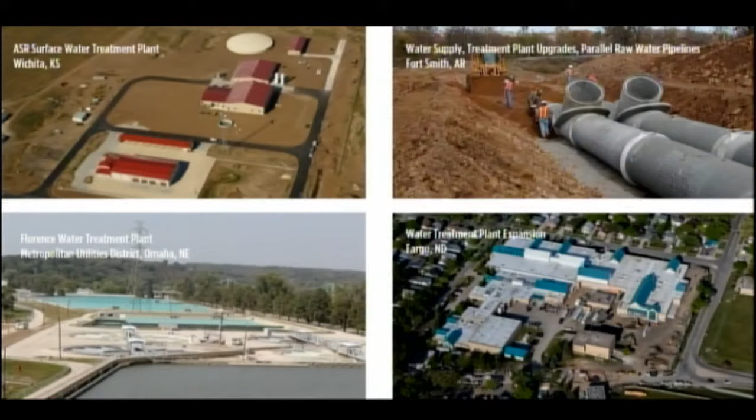A little bit about the experience of the team. Lots of big regional projects. This team, Burns McDonnell and Alberici, did your aquifer storage project. That was a global project of the year finalist, one of 4 projects globally recognized for the innovation the city put forth. Fort Smith, Arkansas's water supply, Burns McDonnell's done both the supply and the treatment plant and is now doing the conveyance lines. The Florence Water Treatment Plant in Omaha, Omaha's largest plant, that HDR has done numerous projects on, and then Alberici's work up at Fargo.

I'm showing you this not to say these projects are the scale of your project. Your project's actually very large in comparison. What I'm saying is we have experience in this part of the country, and in water treatment work. That's important because where you live dictates what kind of water quality constituents you have and what you're doing to treat that water more so than anything else. So these plants are very relevant to Wichita's water treatment processes and very similar to those.

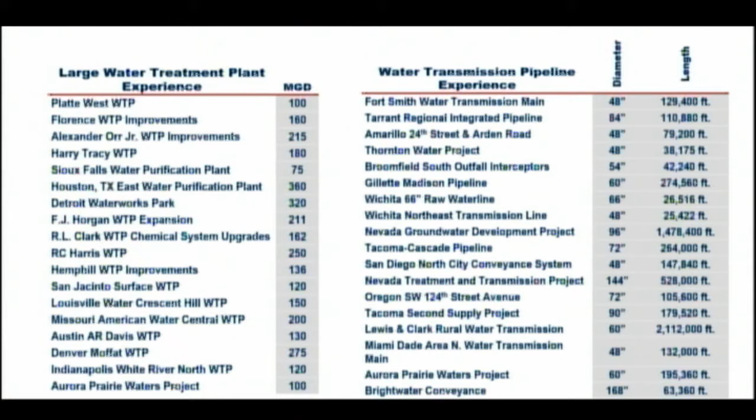That doesn't mean we don't have national experience. We also have national experience. This is HDR's work down at Tarrant Regional, the new water supply into the Dallas-Fort Worth Metroplex. HDR's work at Alexander Orr, the largest water treatment plant in the United States, in Miami right now. Burns and Mac work out in the Rocky Mountain region, advanced membrane water treatment plants that are really state-of-the-art. And then Alberici's work in Toronto, Canada as well. So we have local, regional, and national experience to draw from. In fact, looking at our large plant experience and our large water pipeline experience, we have almost 40 projects we can draw from to make sure we're delivering the right project for you.

Okay, Ron, quit talking about experience and start talking about the project, right?

The last bit of experience I'll show you is this one. I'd like Eric to come up and talk about this as well. This is Omaha's new Platte West plant, constructed just a few years ago. This project is a 100 MGD plant, very similar to what you'll have in Wichita. It's unique for us because Eric and HDR were the lead designers on this project. Alberici constructed this project, and Burns McDonnell permitted this project. So while it wasn't a design-build project, you have all three same partners here delivering your project that delivered this project. Eric, you want to talk just a little bit about this? Say a few things about Platte West and what makes it unique and what makes it match the facility you have here coming in Wichita, the Northwest Treatment Plant.

First thing, like Ron said, it's about a 100 MGD facility, so it's on the scale of the treatment facilities you have here. It's a lime softening facility with 6 solids contact basins of similar diameter to what we're working on here.

Granular media filtration, similar to here. High service pumping, chlorine disinfection with chloramine residual, all the same major elements we have for Northwest were completed here for the Platte West Water Treatment Facility. The one major difference is everything's under one roof. We went with kind of a submarine theme on this one and put everything under one roof.

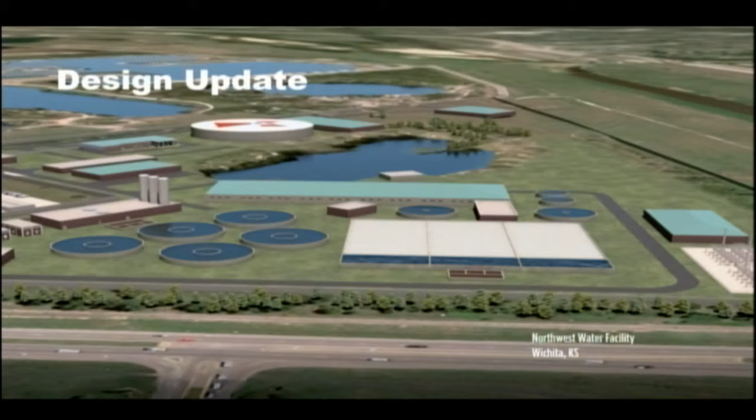Okay, I'm going to turn it over to Eric now. Sure, and we'll start with where we thought the project looked like when we started this back in February. Tyler's going to switch over here in just a minute, and we're going to switch over to the model as well.

This is what we had at the LOI stage. This was the concept when we first started, which you can see some large flocculation basins and other things. Let's go ahead and go to the next slide.

This is where it has evolved to. This is a rendering of the design as it stands today, which I'm going to be walking through in just a minute with respect to the model, so you can see some of the nuts and bolts and details of how this design went together.

The design, as you see it on this screen, for orientation: this is Zoo Boulevard, right along here, and 21st Street runs kind of along the top. That gives you the orientation. Generally north is to your left, and generally south is to your right.

This facility shows the point in design where we were before we started our optimization process. Some of the things you see here we've already decided to change through that process, like reducing the water towers for backwash - I'll talk more about that in a bit. There were 7 circular basins, and we've found a way to optimize and reconfigure that so we can go with 6. So some of the things on here have already been through an optimization process, but this gives us a picture of where we're at.

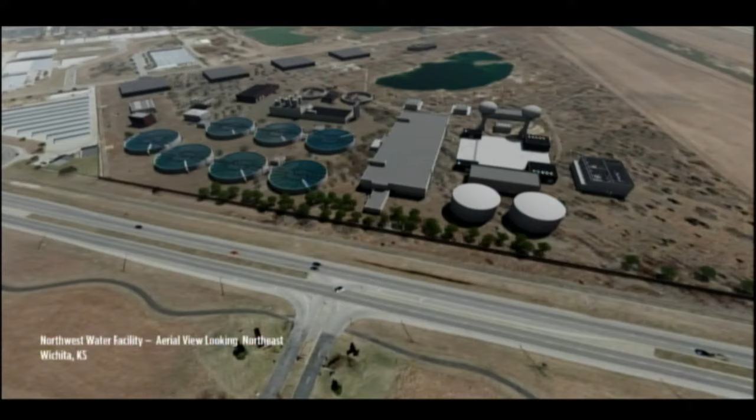Let's go ahead and jump to the model. We've used what we call BIM, or Building Information Modeling, software packages in order to actually do the design. It generates a 3D product from which we can generate the drawings, plans, and sections you might see for a normal design project.

It's important to note too, that's not grass - the blue pipes you're seeing are actually underground, actually buried. We've taken away the earth, if you will, here, so that you can see all the pieces that would be buried. The piping in between structures would be buried for freeze protection and to keep it out of the way so you can get around and service things.

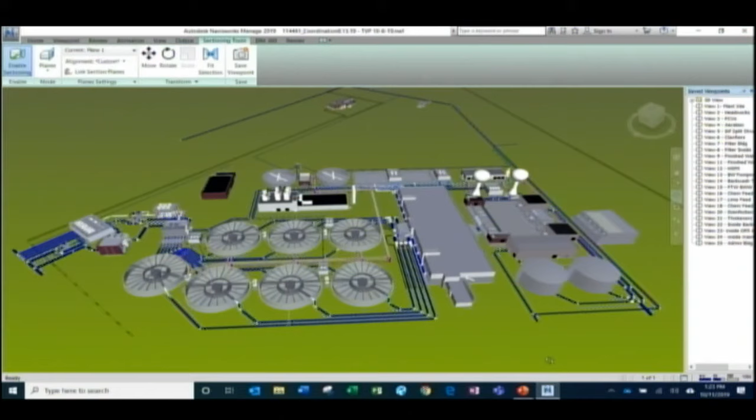But this should look similar to that overall, and it gives you an idea of where we're starting. We're going to move into a step where I take you, like a drop of water, through the treatment plant - what happens and how the design works as the water moves through. We'll also talk about subordinate systems, chemical feed systems, solids handling systems, and then personnel areas, administration, maintenance, etc. So let's go ahead, Tyler, and start at the headworks.

As Ron brought up a few minutes ago, the real benefit to the city of Wichita is you have two distinct primary water sources, the Cheney Reservoir source and a well field source. At the very beginning of the plant, we have the ability to control the flow from each of those sources so the city can optimize what water source they want to use, whether it's a 50-50 blend of Cheney and Wellfield, or 100% Cheney, or 100% Wellfield - and that's done in this very first building.

Before we dive into that building, I'm going to give you a sense of scale. Can I borrow that? I think there's a laser pointer on it - that might be easier for you to see.

See this little speck right there? That is a person door. So that gives you some sense of how big these facilities are. These pipes here are 64-inch pipes, so that's going to come up to your shoulder. These are large and massive structures in order to handle the volume of water that's needed for this community.

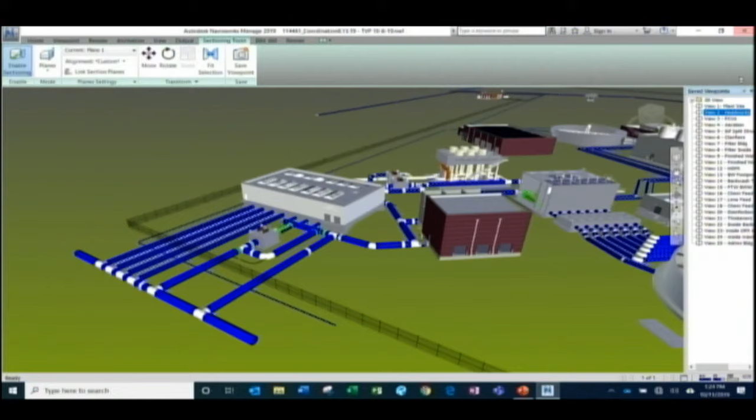So let's open up the lid. We're going to dive into this building.

As I said, you have two distinct water sources: your Cheney source and your groundwater source. We're going to use these valves here and these flow meters that you see in these vaults to really control the flow and allow the city staff to set the rates at which they want to treat the water. So this gives them that first step of operational flexibility.

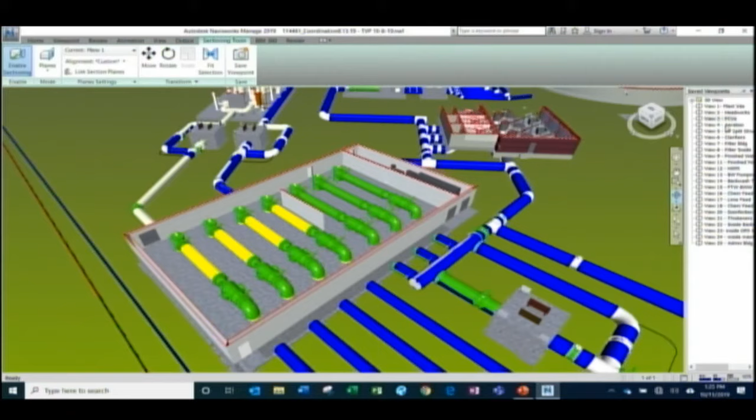Next, the groundwater itself, we're still reviewing this, but we're keeping it to discuss now, is aeration. Aeration is a process that can reduce the amount of lime we use and can also help remove iron and manganese, other things that show up in your groundwater or wellfield sources. So we have designed in here so that the groundwater would come through and go through an aeration process.

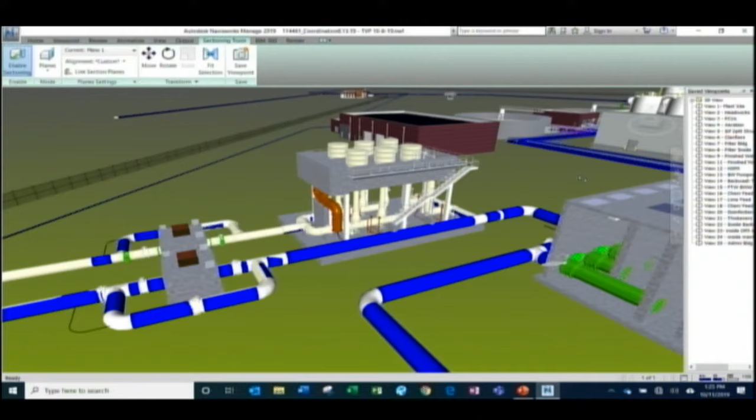Aeration is just like it sounds. The water flows up from the bottom here into these trays, think of like a waterfall. So as the water falls over the trays, it becomes in contact with air, and that does the work of the aeration process. You have an aeration process similar today, so this is an extension of a concept that you already have. But the groundwater would be capable of being aerated in this process.

Next, I want to talk about what happens now. We have both groundwater and your Cheney surface water, and we want to blend those together. We want to mix that up so that when it moves on to the next treatment step, it is a homogeneous or completely mixed solution, so that it makes it easier for the plant staff to operate it, so that all the water going to subsequent treatment steps is the same. It acts the same way, and we can treat it the same. And that happens in this structure here.

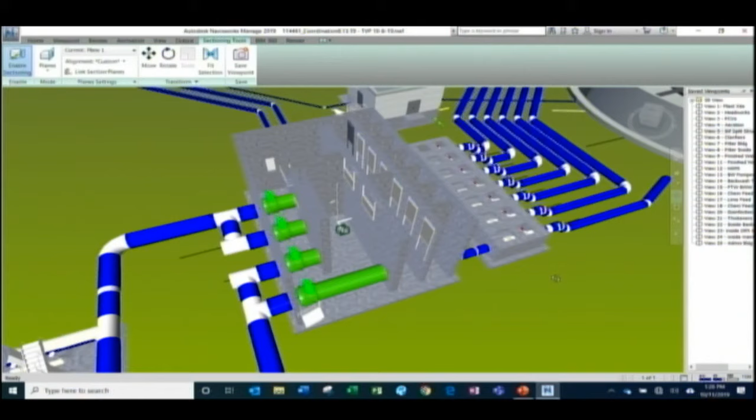Most of the time, the water will come into this middle. There's actually a wall here, but we cut it out so you can see this mixer in the center. What's happening here is both your Cheney water and your wellfield water mix in there, enhanced by the mixer, and then flow over into these and split amongst your next treatment units, which are our solids contact clarifiers. I'll get to that in a minute.

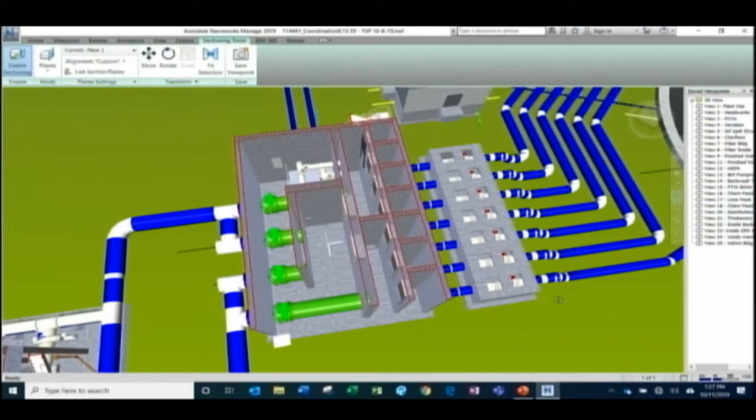This is a great place to talk about the redundancy and resiliency built into this facility. This is the normal chamber, but notice these bypasses on the top and the bottom. That allows us to move to these chambers if we needed to do maintenance on this chamber. So again, like Alan talked about at the very beginning, we don't have a point here where we can't do maintenance, we can still flow water through the plant and meet our 120 MGD requirement.

From this facility here, water flows off to the next 6 or 7. 6 is currently in the model. Solids contact clarifiers, and we'll do that next.

So these solids contact clarifiers are really the heart of your treatment process. This is where the raw water that's been mixed and aerated comes into the center. Think of these things as kind of a donut. The center is the donut hole, and the outside is the actual donut. So the water comes into the donut hole and mixes.

Is this cutting out? I think the battery's dying. Yeah, I'm just going to turn it off, it's almost more distracting. She's trying to find you another one. Is she? Okay, well, we'll go without.

Raw water and the chemicals come into the center zone of the solids contact clarifier, and that's where they mix. That's where we're adding our lime, ferric, and other chemicals that you use today in order to do the heart of our treatment. That's where we're removing the hardness, removing organics, removing other contaminants that are in the water, in that center zone. And that center zone is vigorously mixed, think turbulent. It's got a gigantic propeller mixer or turbine mixer in there, so that zone is mixed up, and if you look at it, it'll be kind of a white, chalky color from the lime that we're adding.

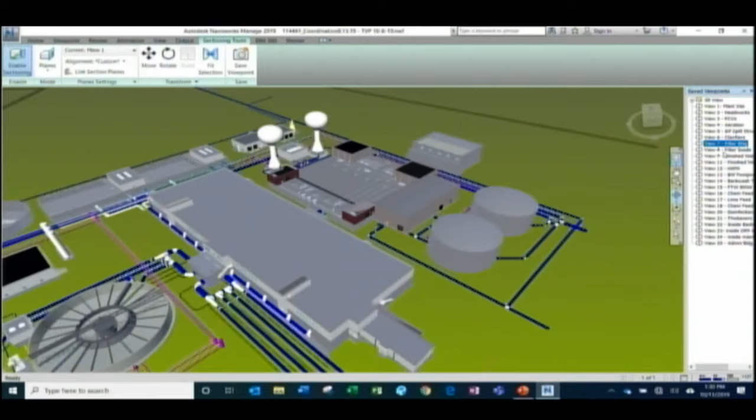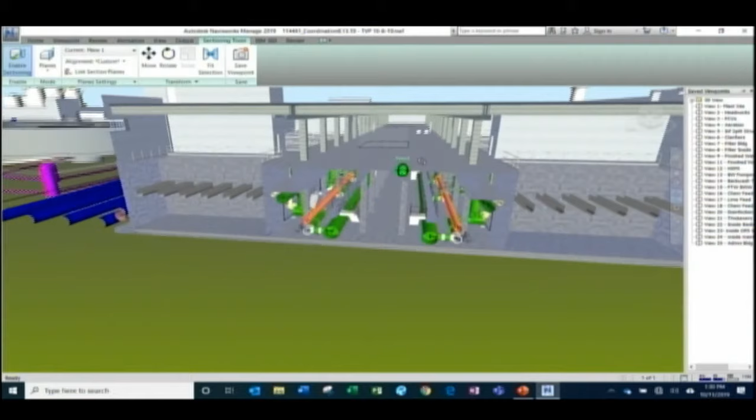The filter technology that we're using here, similar to what you have today and what we did at Platte West and other places, is granular media filtration. So we have layers of anthracite and sand that the water flows down through. As the water flows down through this media, the small particles get lodged in between the granular media cells and they're removed from the water.

So that filter is trapping those small particles in the filter. Clean water goes out the bottom, out through these pipes here, and the filter itself holds the last bit of the contaminants that we have in there.

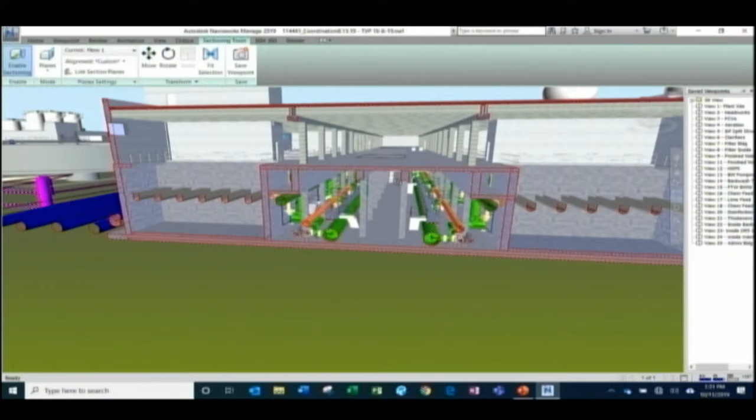A few items that I want to note on this filter building design. If you notice, all this piping is inside, so the large serviceable items for the city of Wichita in the future, valves, instrumentation, is all inside and accessible. You can see some stairs and access platforms that allows them to maintain this plant efficiently going into the future.

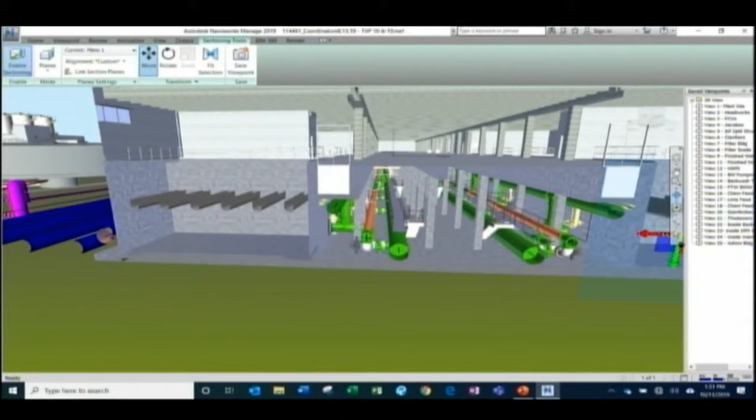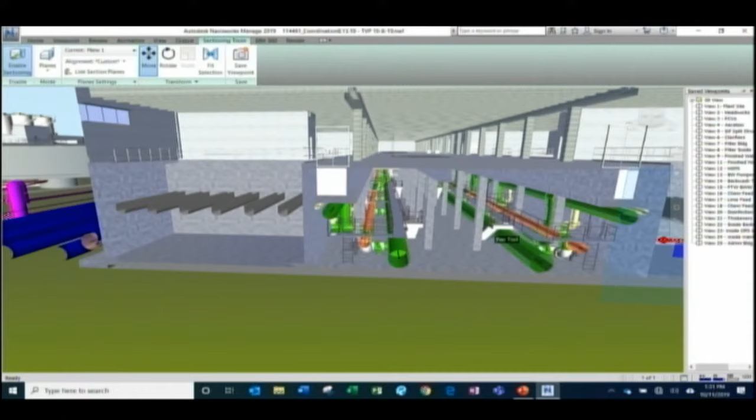The other thing I want to talk about is these channels - you can see one of those gates. The boxes you see there are where the influent water comes in. You can see this white gate here. So back to the resiliency and redundancy part of this, we can isolate small sections of the filter gallery and keep the rest of it going so that you could take a few filters offline if you needed for maintenance and still maintain the flow through the rest of the filter plant, okay?

The last thing I want to talk about is that this whole building is all enclosed in a building at this point. So we have filtered the water - it is clean and ready to go to the distribution system plus one step. And that's all enclosed in the building to keep it out of the elements.

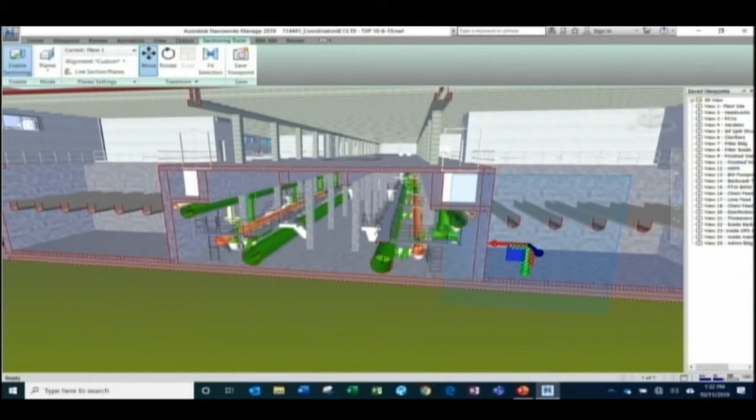After the water is filtered, the clean water that goes out of the filter plant moves on to disinfection. There's a lot going on in this figure here, so I'll try to point these out to you. This is our disinfection or CT basin, this rectangular basin in the middle. We have some backwash pumping stations here.

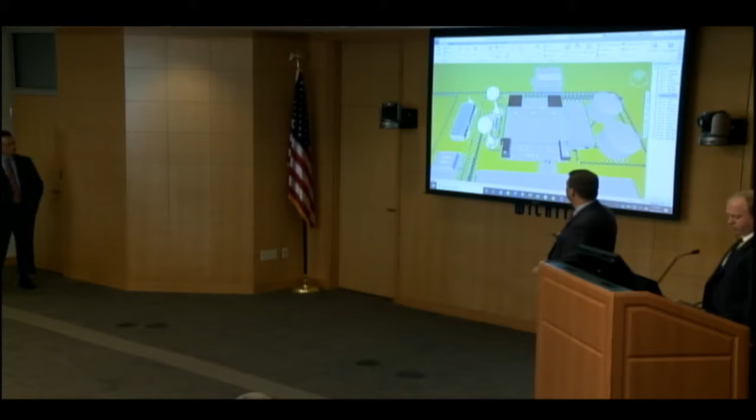We'll talk more about backwash in a little bit. We have transfer pumping or finished water pumping here. We have high service pumps here and storage of clean water. There's a generator, I'll talk about that a little bit. These are the backwash towers, which we have optimized to not need now, so we can use a backwash pump. And there's chemical buildings here, we'll get to those in a little bit.

But I want to focus right now on the center part of this - this is our disinfection step. So after the water is clean, we will disinfect it with chlorine. The disinfection is a function of many things, but one of the critical ones is the time at which the disinfectant is in contact with the water.

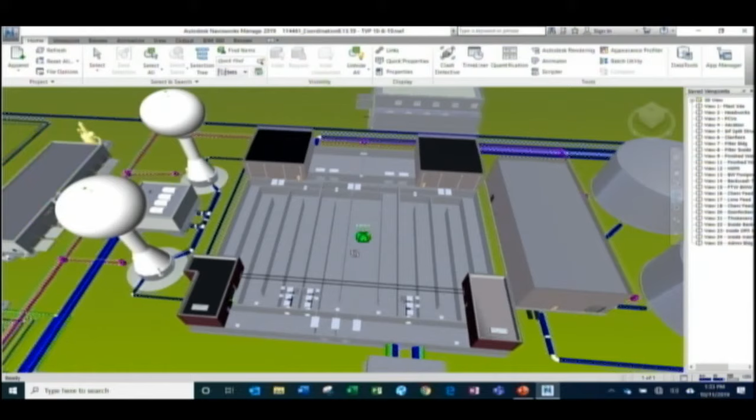And so you can see this circuitous kind of route that we have, these baffling walls in there. That's to make sure that the water works through the CT basin in the amount of time we want, avoid short-circuiting and get the full disinfection that we're looking for. So we're applying chlorine. Just scale as well - this building's also over a football field in size, right?

This is well over a football field as well, like two side by side probably. So you've got the main field and the practice field, that kind of thing.

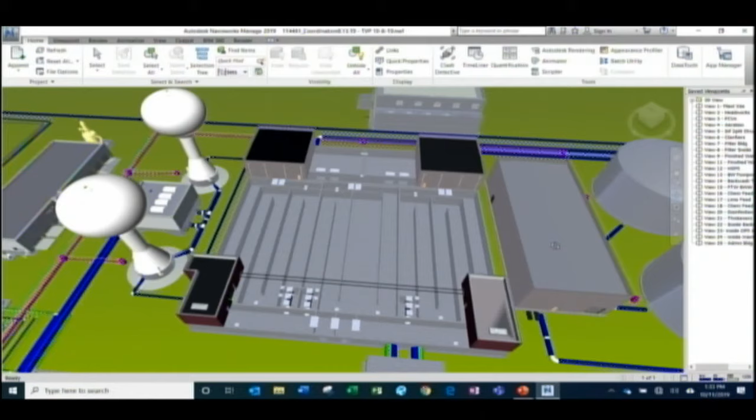For scale purposes, we add chlorine at the front, and then at the end, for our residual disinfectant, we're adding ammonia to form a chloramine. That's similar to how the city does it today. That chloramine disinfectant residual is what's distributed out to your customers, to the cities and homes of the citizens of Wichita, and that protects the water as it moves its way out into the distribution system.

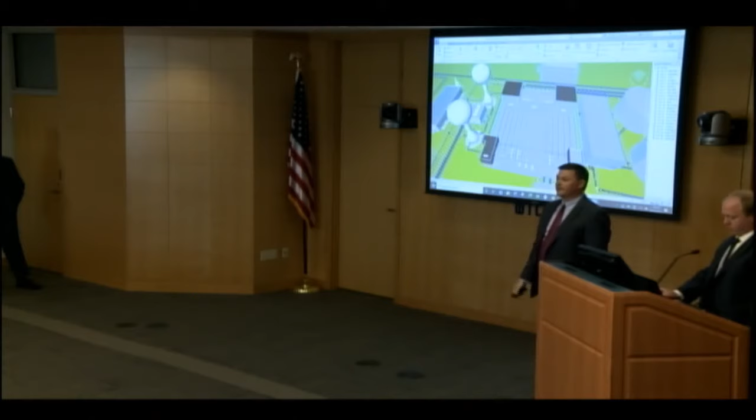As I talked earlier, there are all kinds of different pumping applications, and we'll talk first about finished water pumping. So we have water that, after it's been disinfected, we transfer to the HES, your existing HES reservoirs pumping stations. These pumps are designed to pump water that's disinfected out of the reservoir and transfer it to HES so it can be distributed back out into the city.

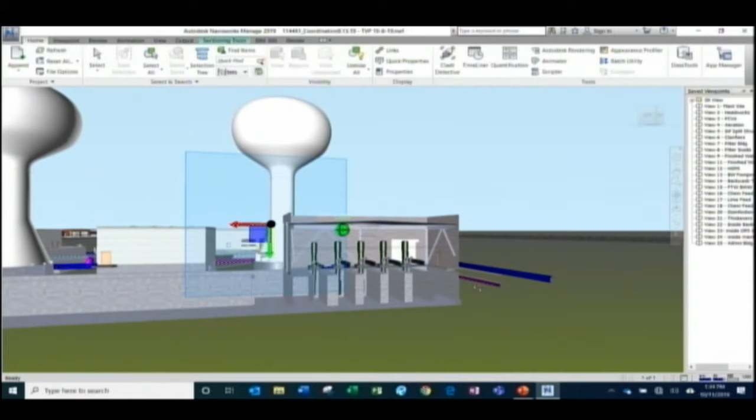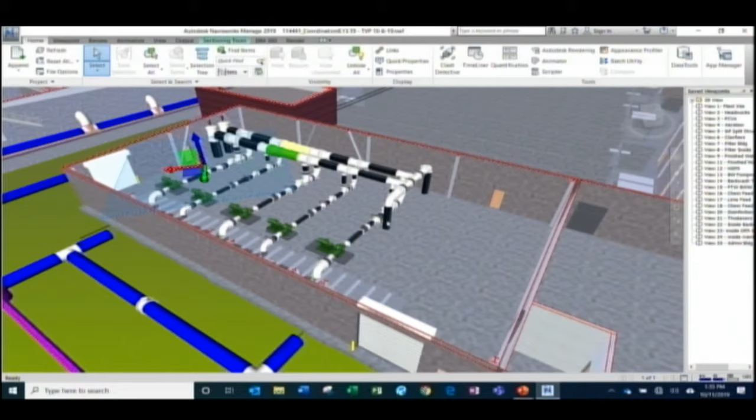We also have, let's go to the high service pumping station. In another mode for resiliency and redundancy, we have high service pumping right here at the treatment plant. High service means it goes directly from here to your customers, to the distribution system, to the residences and businesses, right from this plant. So the actual pumping that distributes it out to the community is somewhat here and somewhat at what you have existing at your HES facility.

So if you have a problem at one HES, you can still push water to the community from here.

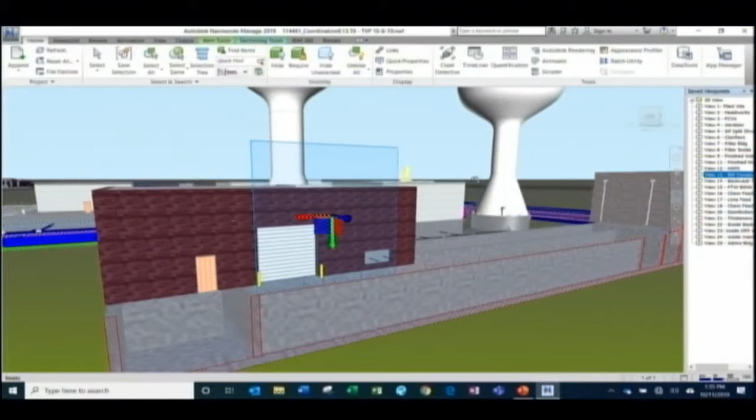The last pumping function that occurs in this station is backwash pumping. And like I said before, the towers—we've gone through an optimization process and we can do the level of backwash we want without the tower.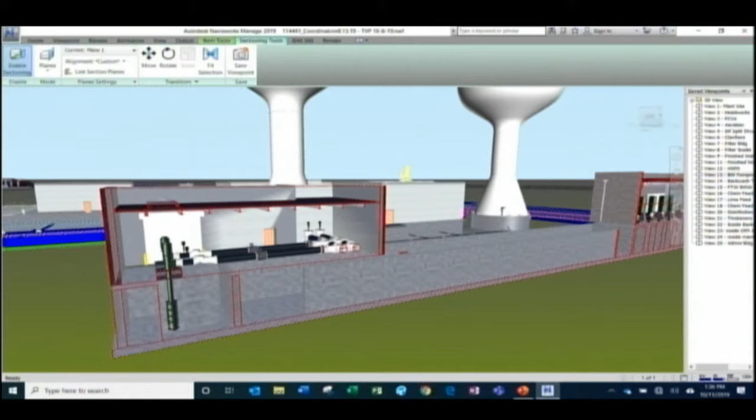So backwash, what's that mean? Remember we talked about the granular media and the filtration, and how all the little particles get stuck in the media? Well, that has to be cleaned out. Backwashing is just exactly like it sounds. We push water backwards through the filter at a vigorous and high rate, and that takes all of the media and separates it out and generates a lot of collisions, and all the little dirt particles work their way out of the media and go out from the filter so that your filter is clean and ready to go into filtration mode again.

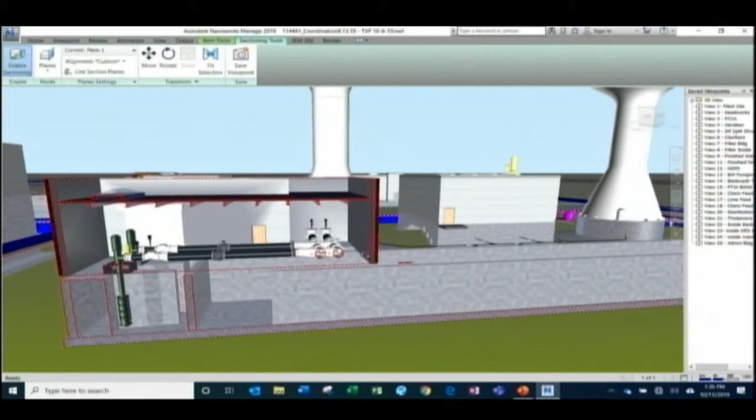So we use pumps to pump water backwards through the filters in order to clean that media. That water, which comes out of the filter after the backwash, will go to a backwash equalization basin. That water is good water, and we don't want to waste it, so we can take the backwashed water and return it to the very beginning of the plant and treat it again.

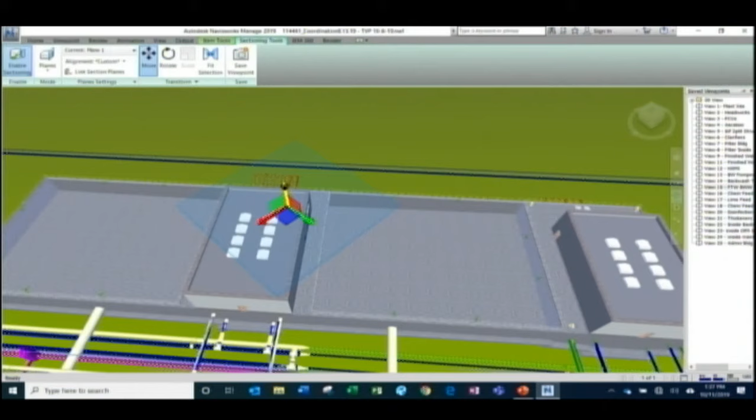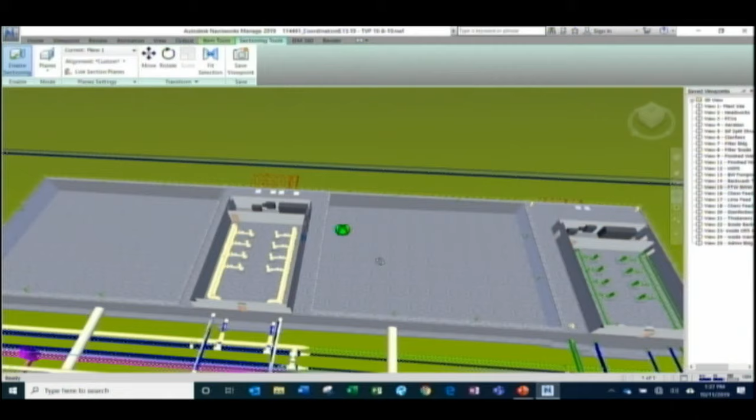This allows us to reduce the amount of water we need to take from Cheney or your well field in order to produce water going forward. So this is an efficiency step that allows you to recycle some of that water back through because it can be used and treated again. We have basins here that collect that backwash water and pumps that return it to the head of the facility, at a steady state all day long. The backwash may take 15 or 20 minutes and generate a large volume of water, but we want to return it steadily the entire way back through the plant. That's what these basins do.

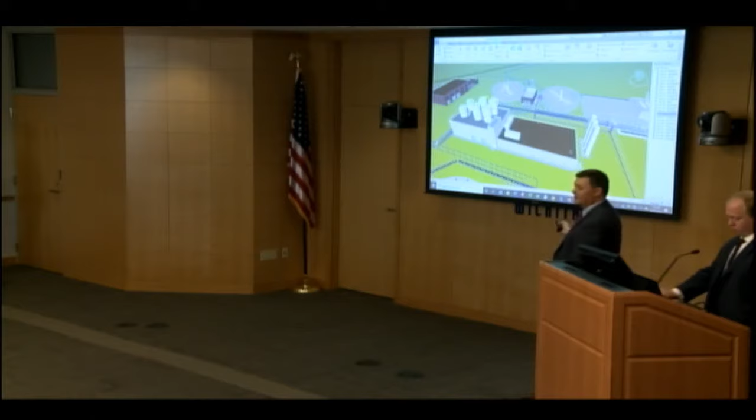Remember back to the solids contact clarifiers, we talked about adding chemicals. Chemicals in water treatment have specific design-related items that warrant keeping them in separate buildings. So we have all of our chemical systems for the treatment of the facility in their own buildings, so that we can manage ventilation and safety-related items and keep those chemicals separate. We have dry chemicals like lime here, and liquid chemicals like polymers and other things. So we're going to cut in and take a look at the dry chemicals.

This is the lime feed system. We have dry storage here, it comes through the building, and is slaked.

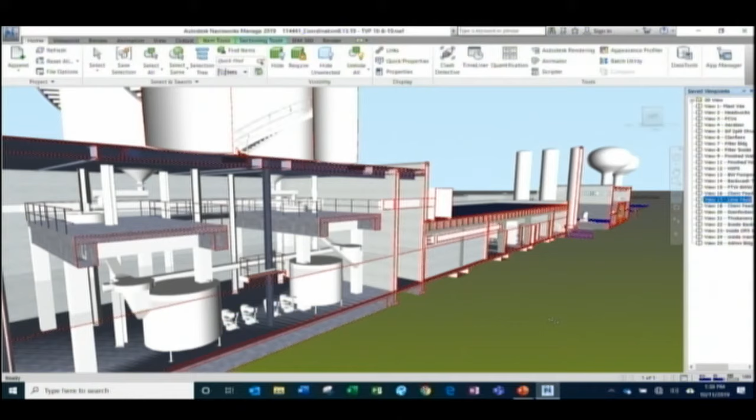Lime is one of those chemicals that as dry, you have to mix it with water to make it useful for you, so that's called a slaking process. So we're going to slake it, and then we can pump it out to the different solids contact clarifiers we've already talked about. Similarly, on the liquid side, we have a series of bulk storage tanks and chemical metering pumps, which pump a precise amount of liquid out to the different treatment units.

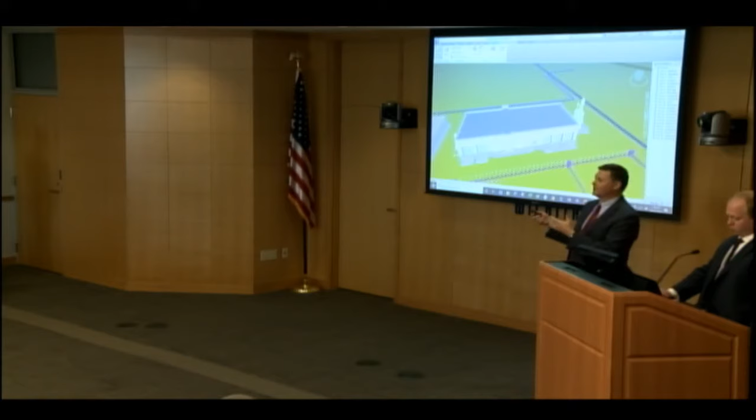We talked about disinfection. The disinfection chemicals, your chlorine and your ammonia, are also in their own building for the same reason as the others, to maintain ventilation rates and safety. So we're storing both chlorine and ammonia in their own separate building, and then they will be metered out to the rest of the facility as needed.

The last thing we want to talk about from a treatment perspective is solids. At the beginning we talked about the heavy solids going down to the bottom of the solids contact clarifiers. Those solids are periodically pumped out to be disposed of, and they go into these thickening basins, and then these pumps will pump them to the city's existing lagoon system where your solids go today. So that's the solids management portion. That takes us through the high level of the design.

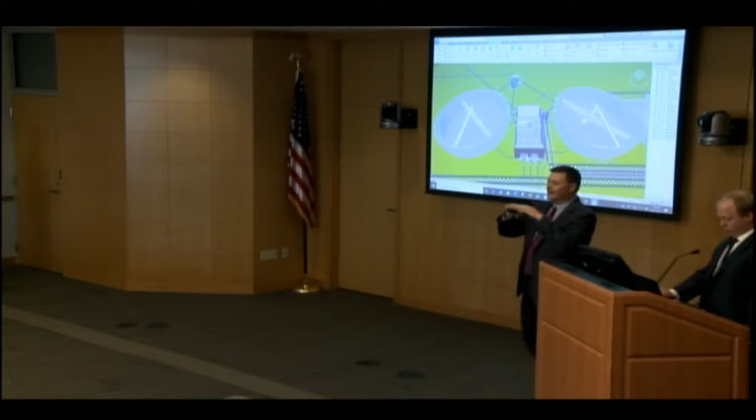As you can see, there's a lot of detail, a lot of piping, a lot of valves and parts, but I hope you understand now how we get water from the beginning to the end, and all the facilities that support that and the design level that's gone into this at this stage. One thing to move on to is that you've got people that run and operate these facilities, so there's personnel spaces as well for the treatment plant. Let's go to operations first.

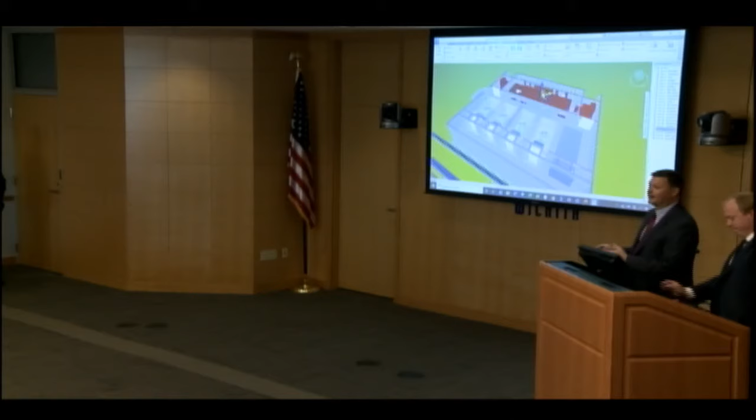Oh, backup power, thank you, I almost forgot. Part of the resiliency of this facility is providing backup power. In the event that you would lose utility power, we have a series of diesel generators that would provide power for the facility so that it can be maintained in the event of power loss.

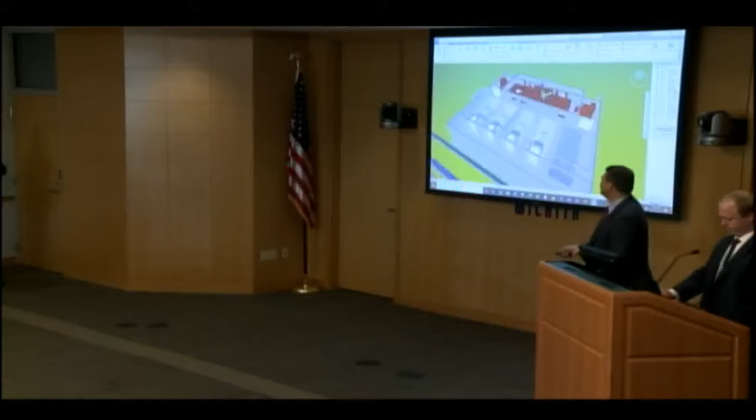Now we'll move on to personnel areas. The first one is operations. Operations are people on the day-to-day front lines of operating this facility, monitoring the large SCADA screens, watching chemical feed rates, flows, etc. The guy that sets the flow rates we talked about at the very beginning, this is where they would be housed. This building is a hardened building designed to withstand severe weather, so in the event of a potential tornado, they would not have to leave their post. They can stay there and continue to work, and that provides for the resiliency of this facility. This sits just adjacent to the filter gallery, in the heart or center of the plant.

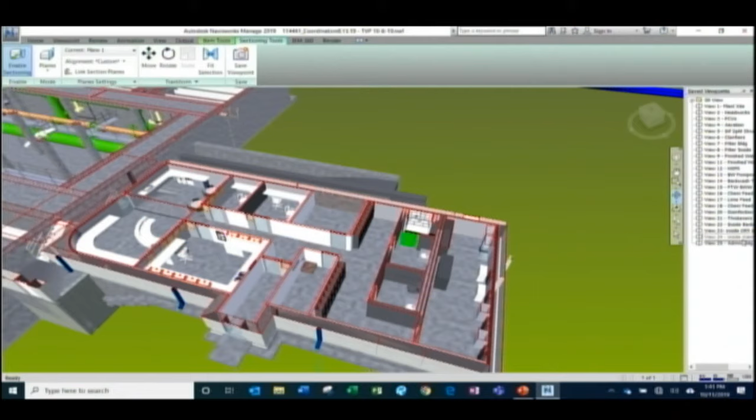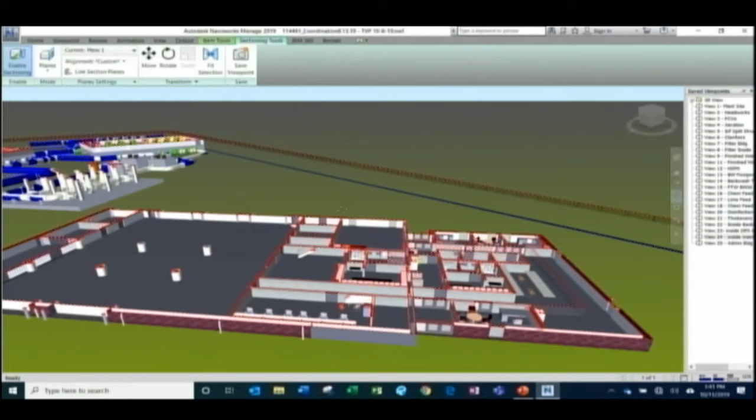The next major personnel area is maintenance. You have several maintenance functions, whether it's repairing valves or calibrating instruments. A maintenance facility allows your staff to maintain this well into the future, so it can last like your current one, 80 years or more. The maintenance facility consists largely of personnel areas like locker rooms, office space, and a huge amount of maintenance space. These are tailored to the type of job they might do.

If you're cleaning and working on a sophisticated electronic instrument, we have a special room for that so it can be clean and neat, and they can work at a table. If you're overhauling a pump, you want to be out in the general maintenance area—that might be a dirtier or messier job. We have room for storage of parts and equipment, and specialized rooms for flammable storage, sandblasting and painting, as well as welding.

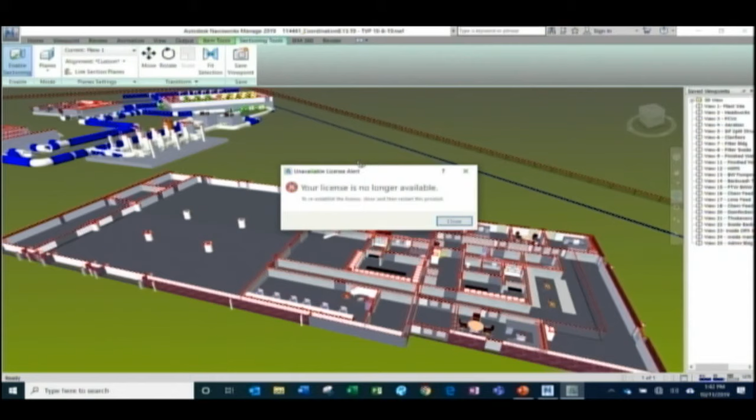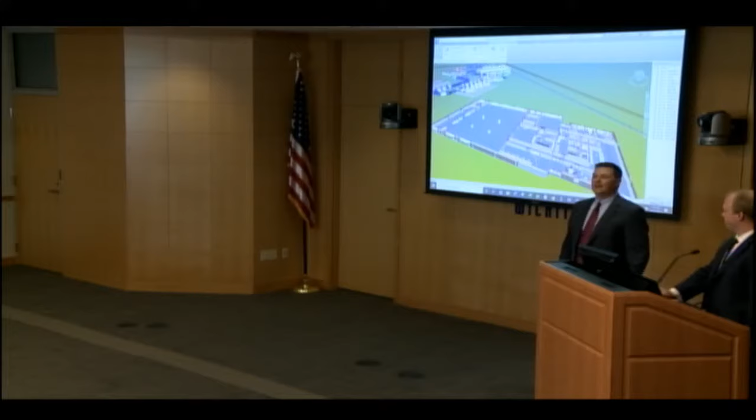Yeah, always technology, isn't it? We need to get it back into this room and fix it, right? The electronic stuff. But these facilities are separated. The point is that you have adequate facilities to do maintenance, and it allows them to separate the types of tasks so that one doesn't contaminate or bother the other.

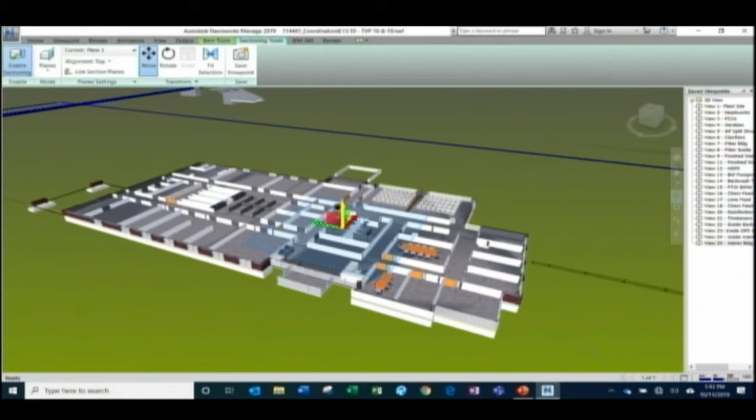The last personnel area I'd like to talk about is the administration building. This is the front door to the treatment plant. It will house administrative personnel, but the largest portion of it, if you cut down through it, is the city's fully accredited laboratory. This is where they're doing tests to ensure compliance with the Safe Drinking Water Act, as well as testing they do for other communities.

So that takes us clear through the overall design process, and this model you see here is the culmination of lots of input and lots of people's effort, both from the city and the city's engineer, the owner's rep, and HDR, everyone on the team. So, any questions on the design?

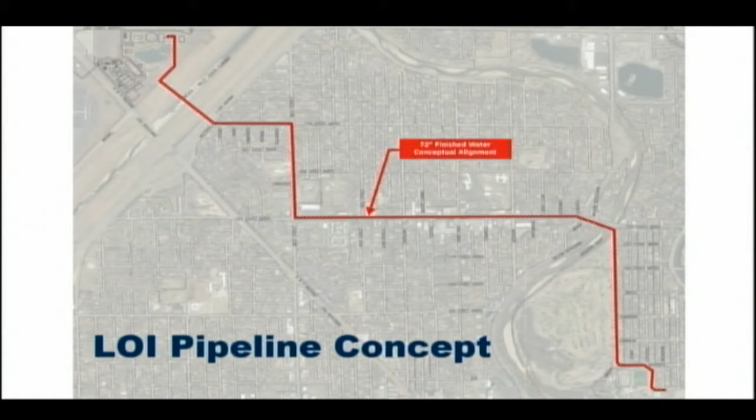I'll take a quick minute to talk about pipelines, or how we get water from this facility back to your current facility. In the original plan, there was a new 72-inch pipeline proposed to go from the new treatment plant down to the current plant. One of the things we looked at early in the process was whether the city has other infrastructure available so you don't have to build another pipeline to connect these facilities. And the answer was you do, and it's in pretty good shape.

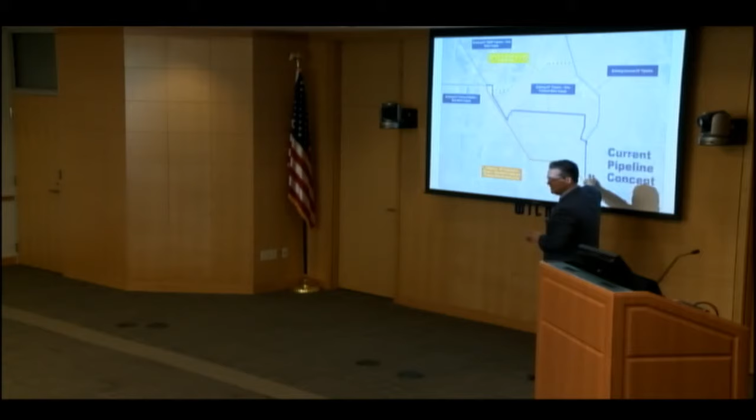So we worked with the city to access and utilize that infrastructure and take advantage of the investment the city's already made. You'll see the blue line takes advantage of what would have been a raw water supply line coming to the old plant. Now that we've treated it, we'll use it as a finished water supply line down to the Hess pump station so it can be pushed out into your system.

What you see in orange and yellow are other elements of moving water that we're considering. The city really wanted a couple of things with respect to movement of water between these two facilities: a way to get it there, and also a backup way in case of a catastrophic failure in that line. So there's another existing raw water line that can be repurposed for an emergency condition.

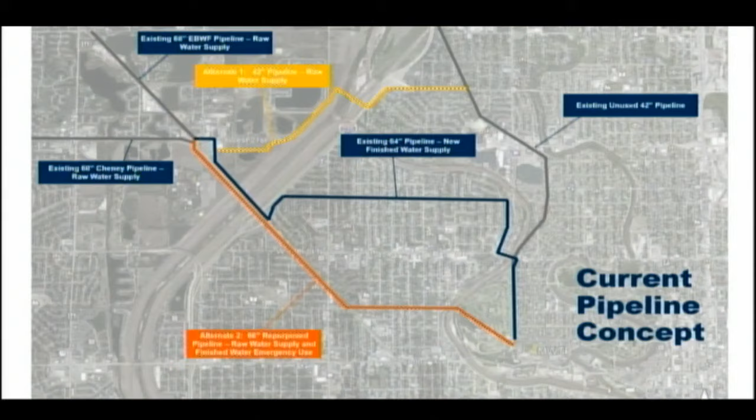They also need to move local well field water from down here back up to the plant. That can move one of two ways: back through an existing pipeline and then a new 42-inch pipeline of about 4 miles across to get that local well field water back to the new plant.

Or we can have a dual-purpose line. This is one of the things we've identified as a potential cost savings that the city will spend the next few weeks looking at: could we use this line in dual purpose? As an emergency line for your finished water, you can't connect it to your finished water system directly—you have to have a physical disconnection. So we could use this line to pump local well field water up to the plant the 99.9% of the time you'd need that.

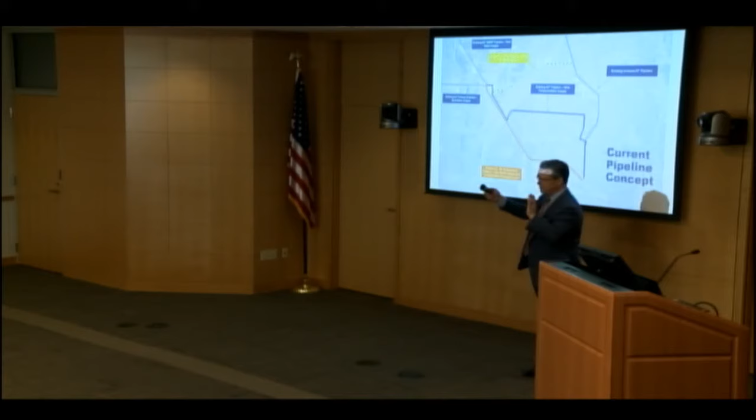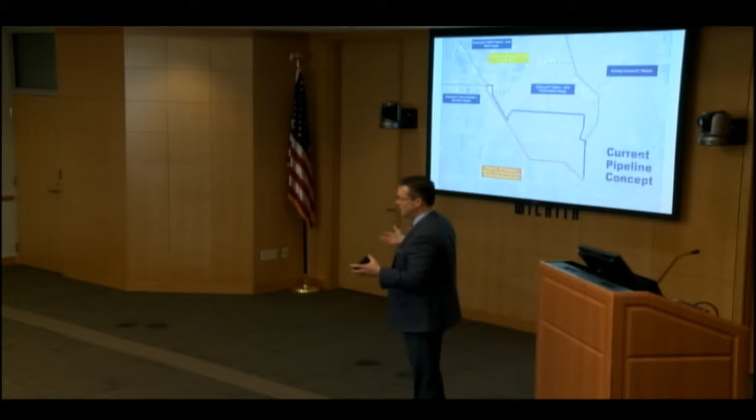And if you have a catastrophic emergency, you can then connect the pipeline to the finished water supply, clean it, disinfect it, and use it to get water back down to your pump station. We think it's a great alternative for the city to consider. As part of it, it's about a $20 million swing in the cost of the project—I'll show you that in just a minute—and something we hope can be of some benefit to the city.

Okay, so lots of slides there. I know you had a lot of model views, probably not very sexy facilities compared to what you're used to, but for water plant designers, those are pretty sexy facilities to look at.

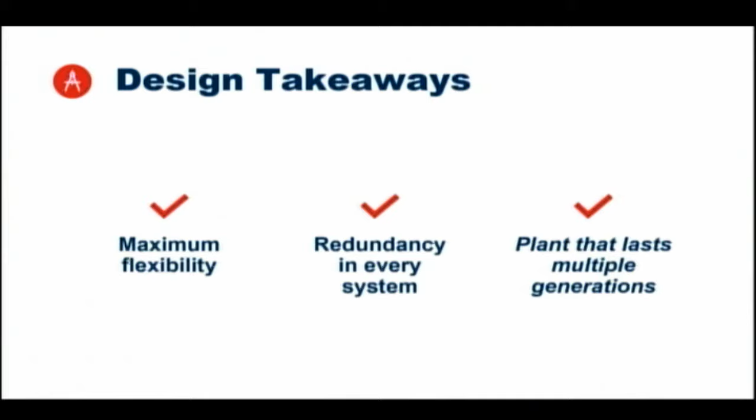So the things I'd like for you to take away: you've got a project that's going to have maximum flexibility. The city will be in a position where they can treat any of their water sources, and do it well, flipping back and forth between the two easily. You've got redundancy in every system—there are no single points of failure in this project, which is important because you have one water plant and always have to be able to provide water out to the community. And finally, you've got a plant that's going to last multiple generations, similar to the plant you have now.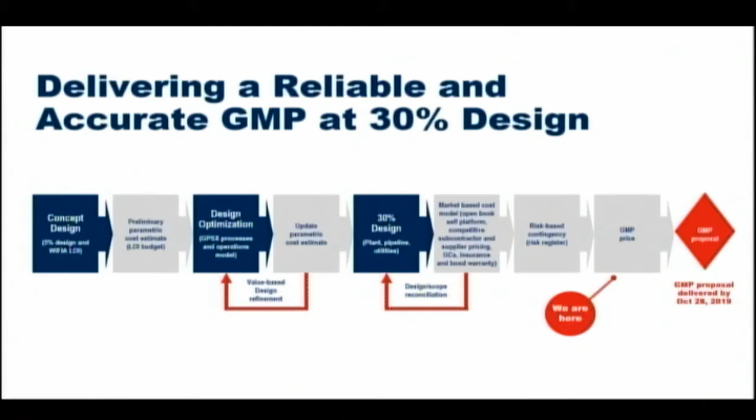This is where we are in the process. I know there's been a lot of discussion on a contract extension for us. We were actually scheduled to deliver that GMP on October 4th. We asked for a contract extension so we could take an extra 3 weeks and deliver that price on October 28th, because we believe there were more savings to be had. That pipeline was one example of savings worth the city considering. The city will have an opportunity to do those in the next few weeks, so that when we deliver your price on October 28th, that is the guaranteed maximum price—the price the city can count on before they submit their WIFIA application.

So Ron, if I might say, are we going to hit our original deadline for applications submitted to the feds? You are. There's absolutely no delay in the WIFIA process. No delay at all.

Wonderful. You might say, well, I thought it was a longer extension than 3 weeks. Well, it was about a 2.5-month extension. We're going to deliver our price estimate on the 28th, and then we're available to support the city. The city's owner's engineer, Garver, has been going through this process with us, so they've seen costing all the way through, but now they need a chance to really dig into the cost model, understand the pricing, and make sure they agree with everything delivered as part of our proposal—that occurs in early November. So the back half of that contract extension is just to allow us to support the city in the WIFIA process, the SRF application process, and any needs in reviewing the proposal as we go forward.

All right, some real quick stats. This is a big project. I know you've got some big projects underway in the city, but this is a really big one—almost 1.6 million man hours to construct this facility.

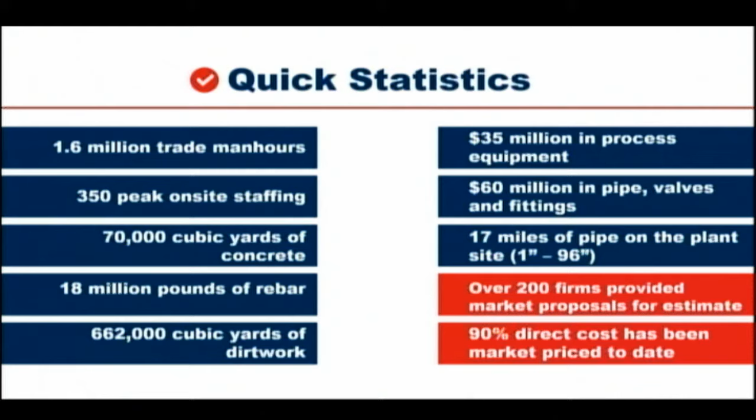The two things that I think are most important I put in the bottom right. There's already been 200 local Wichita and Wichita regional firms or companies that have participated in the pricing exercise. So it's not just the 13 companies that you saw in that original organization chart. We have already reached out to the community, and we have a ton of local companies feeding us pricing information back to make sure we've got realistic pricing as part of the project. Then the other thing I think is important is that about 90% of the direct construction elements have already been competitively priced. So it's not enough for us to just give you an estimate and say that's what we think it's going to cost. We're getting multiple estimates, multiple pricing from different contractors, and we're trying to make sure the city gets the best pricing as we go forward.

I see a hand up. Are we taking questions from the public, or do you want to finish the presentation? I think we are on such a tight schedule, you probably need to finish the presentation. Okay, if there's time at the end, we might be able to.

Okay, so here is what I call the up-down chart. I'm pretty plain and vanilla in what I do, what more sophisticated people call the cost development curves associated with the project. So what you're seeing is the price of the project as it progressed from the start back in February all the way through where we are today. This is not meant to be a detailed accounting of the project. This is meant to give you a sense of how does a design build or progressive design build process work. I'm responsible for capital programs in Kansas City, Jackson Mississippi, Shreveport Louisiana, worth about $6 billion, and I can tell you every project goes through this cycle. I'll walk you through that cycle.

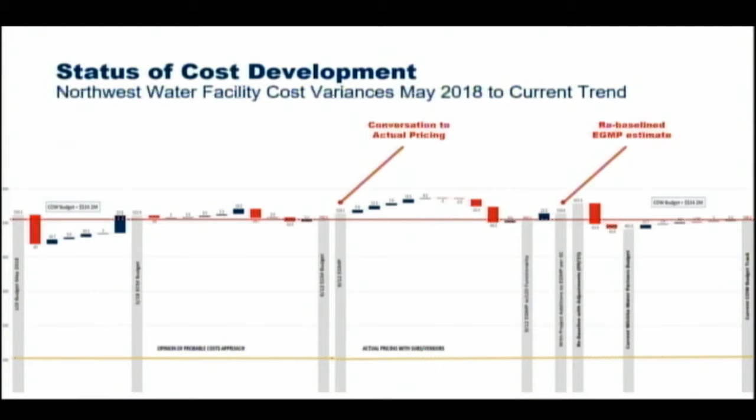You start with a very conceptual estimate based on industry norms. As you work through the design, the designers and the operators and the people that are going to use this facility really start to think in detail about what kind of flexibility they want, what they need from a process standpoint, how it works. You have a little bit of a reality check and say, okay guys, this is great, but we're way outside the scope of this budget. We need to think about how we pull it in. So we start looking for opportunities to pull this project back into budget. You see this went through two cycles of that.

Right here is where we went from conceptual pricing to actual pricing, so you'll even see a little difference here in those parts. That's why that is, because now you're working with actual pricing. Same thing, finished the design, working through the pricing. As we started to look at how to optimize the project, we started looking for value engineering opportunities, really optimizing the process to bring it back to where it needs to be.

We would love to spend an unlimited amount of money on your water plant. I don't think you want us to in the end. You want a plant that's going to last you for multiple generations, but you also want a plant that's cost effective in both capital and operations, because in the end, SRF is not a grant, it's a loan—it's going to have to be paid back. So we want to provide the most value for the city at the least cost that we can provide.

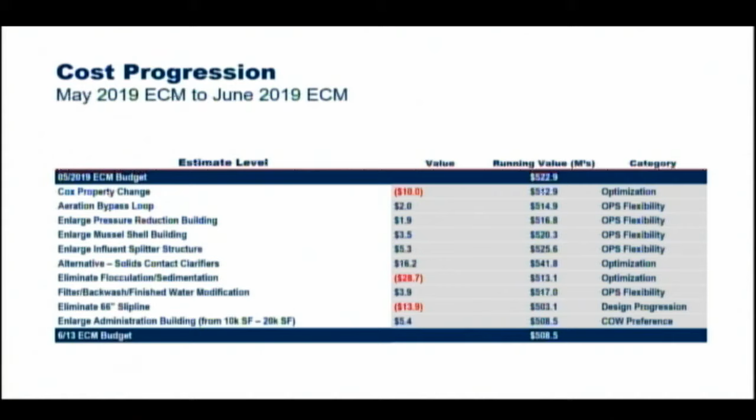As the cost progresses even further, right here, I pointed, now we're in actual cost, right? Right here, I had pointed to the point where we said we're really starting to look for optimization and value engineering. You can see that in these numbers.

Above it, you can start to see the impacts of uncertainty in the construction market. Remember, we're pricing a project that's going to be complete in 5 years. And there is a lot more uncertainty today than there was a year and a half ago when the first budget was developed. Uncertainty around trade, uncertainty around inflation, uncertainty around what the economy is going to be doing in that 5-year period. Pricing reflects uncertainty. Contractors quantify that risk and they adjust their pricing accordingly to what that's going to be.

I told you that the most important number is the number at the end. So what we have told the city is our price on October 28th will not come in above that number, which is 508, just right around 508 million.

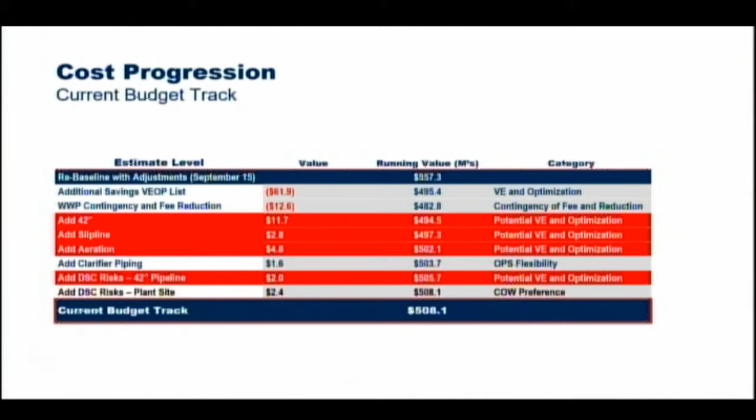We'll take the next 2 weeks to finalize our numbers. I told Alan before we started, there's 55,000 line item inputs into this estimate. 55,000. The numbers are moving all the time as you move forward.

That's why I said that's not a detailed accounting. I can't give you a detailed accounting at that level. It's too high a level as part of it. Focus on the end number, and then Alan and team will focus on how did they get to the end number, and does the city agree with that process and what's in that number.

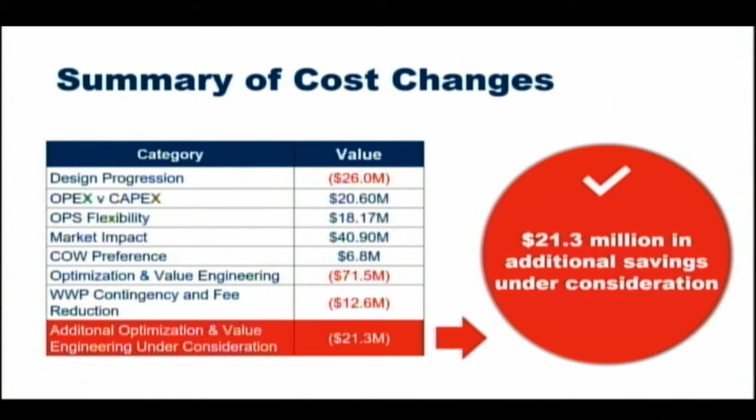So I hope your cost takeaways are: when you get that proposal on October 28th for no more than $508 million for us, 508.1, when the city accepts that proposal, the city no longer has exposure to inflation. The city no longer has risk of cost overruns, and the city has delivered a project that's in line with what WIFIA, or EPA, has already approved for your WIFIA loan. So those are big deals on a 5-year project, to have that risk shift to the design builder.

All right, well, we didn't just have design goals, we also had operational goals. So new facility, we're treating to a new water quality standard as part of this facility, and we're also treating both water sources with much more flexibility. So one of the targets we had, or were given as part of our contract, was: tell us what the

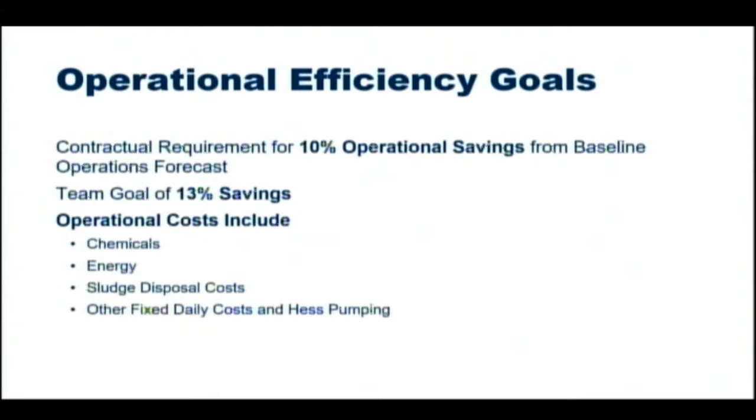baseline cost of this facility is, what you expect from an operational standpoint, and then beat it by 10%. So we both have to justify the baseline, and then we have to justify what we think is going to beat that baseline. We had an additional goal of saying we don't just want to beat it by 10, we'd like to beat it by a little more than 10. We only look at chemicals, energy, and sludge disposal costs. We're not trying to look at labor, because the city will have that, its own calculation. I would assume labor costs will go down with more efficiency in the plant, but if the plant's understaffed at the current level, that may not be the case. We'll let Alan and team work through that. So we're just looking at chemicals, energy, and sludge disposal costs.

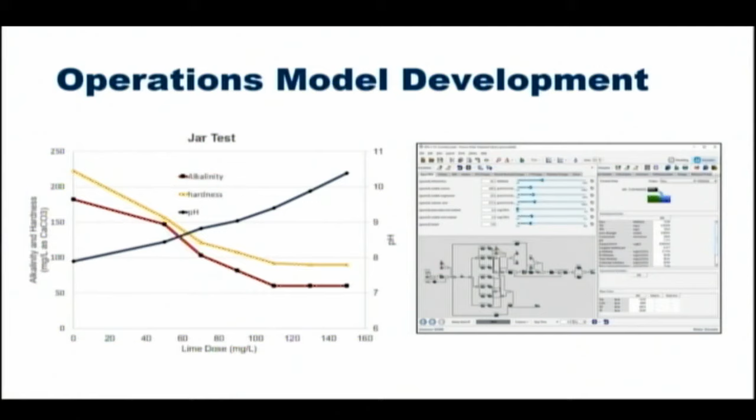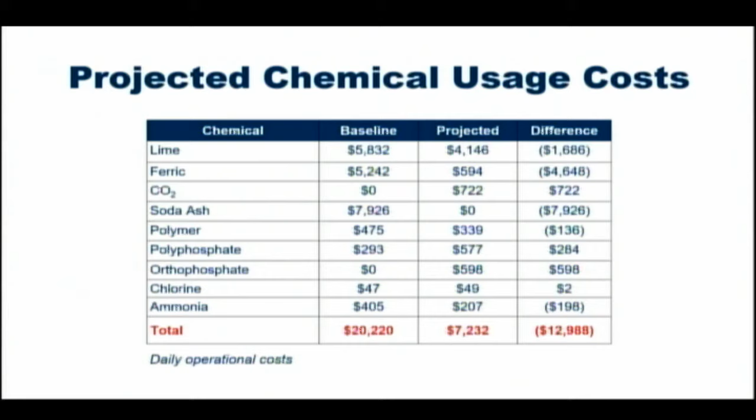The model development included both physical testing on chemicals - what we call jar testing - how much chemical do you need to reach the treatment parameters that we want, and a model that then demonstrates what it's going to look like for the plant as a whole. On chemicals, you see what we think the baseline plant, or the baseline design, would have been, and then what we think the new, optimized design will be. Same thing for energy and sludge disposal - you see a baseline number and a projected number, and the difference.

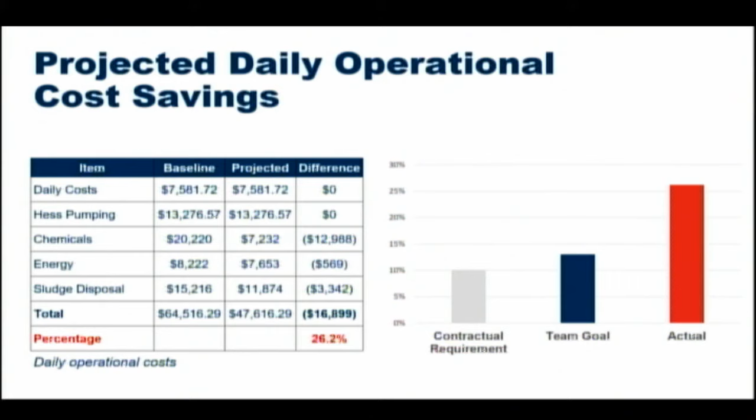So when you look at that sum, we projected the baseline plant at about $64,000 a day. We think with the optimizations in the process that have occurred, it'll be closer to, or much less than that - about a 26% reduction from the baseline to where we think we are. Not many people think about operations in dollars per day. If we think about that in annualized numbers, that's about $6 million of annual savings through process optimization. If you want to look at it over a period of 20 years, it's about $123 million. I told the city manager the other day, if you want to look at it over 80 years, which is how long your plants lasted, that's about $500 million. It's paid for itself. You just got a free plant.

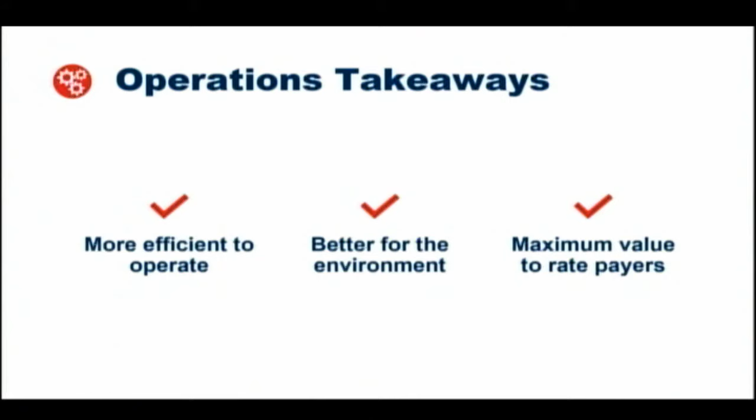So the operations takeaway: you're going to have a more efficient plant to operate. It's going to be more flexible. It's going to be better for the operators to be able to deliver water. You're going to have a plant that's better for the environment. Often people say, what do you mean better for the environment? I mean less chemical usage, less sludge disposal as part of it, and you're going to have maximum value to the ratepayers as well.

Ron asked: real quick, as you continue to work through this, would that number conceivably even go lower? Yeah, you're really just comparing baseline to projection. I think we're far enough through the process changes that you're not going to see much more. If aeration, for example, comes out, that number would go lower, because that's a cost. But the pipeline probably won't change it a lot, other than maybe energy costs if one option takes more pumping than the other. Well, it's already pretty significant. Every little dollar helps.

It's a significant number, so we're almost done. I thought we'd talk just real quickly about the financing so you understand the financing package, and then we'll be open to questions. John Mitchell's going to come up and help me do this. John, we're going to go really quick because we've already kept everybody an hour. So we heard Alan talk about... here you go, John.

So we heard Alan talk about how critical the project was. We heard Eric talk about the resiliency and the robustness of the design, and we heard Ron talk about the size of the project and that it will take 5 years to deliver. Because of all of those things, it's really important that we have an equally robust plan to finance the project. The city staff and design team have done a great job designing a financing plan that's robust and can finance the project.

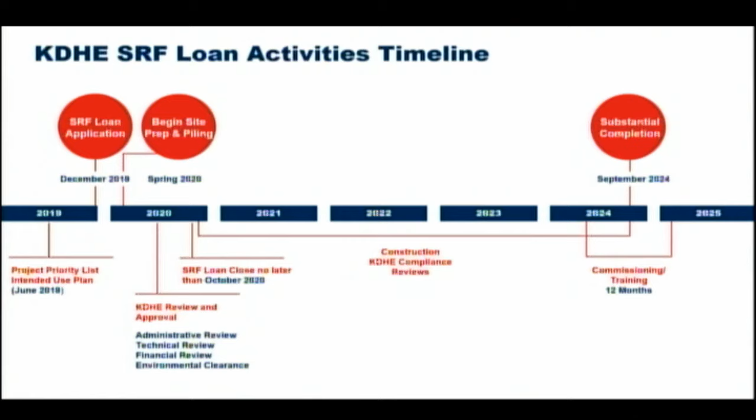The WIFIA application is coming up. It's due here October 30th. Everything is on track to meet that deadline and have the application submitted. Then it can take up to a year for EPA to review, approve, and get that loan closed. From that point forward, the process works just the same for WIFIA as it does for the state's SRF loan.

Yeah, so a couple of things to be aware of. One is the WIFIA application is due October 30th. I told you we'll submit our pricing on the 28th. You don't have to have our pricing to submit the WIFIA application, but what you want is to know I've got a project that's going to fit within the loan amount I'm asking for from EPA. We're telling you that it's going to fit today. We'll give you that as a firm proposal on the 28th of October so that when you go to EPA, you've got the funding available to deliver the project.

I think the other thing that's important to pay attention to here is the end date. This project is an end of 2025 timeframe. There is a way to pull that forward, and there's actually a couple of things that are key in pulling that forward. One is, as John said, there's a year delay in the project as WIFIA closes, or as the EPA closes the loan.